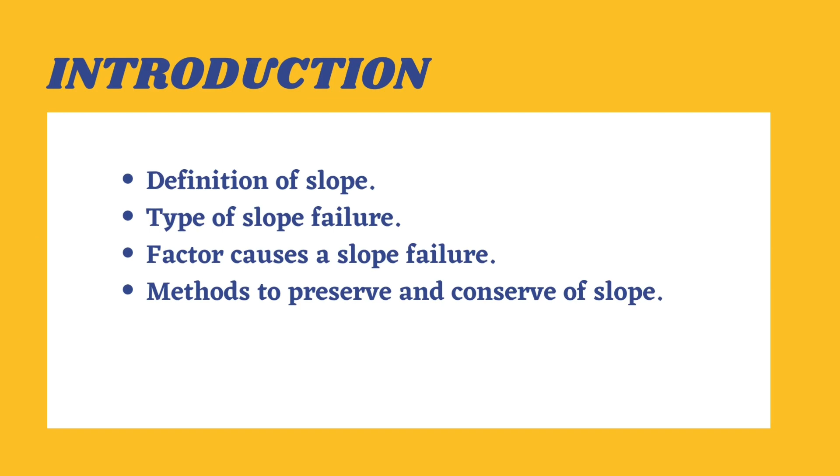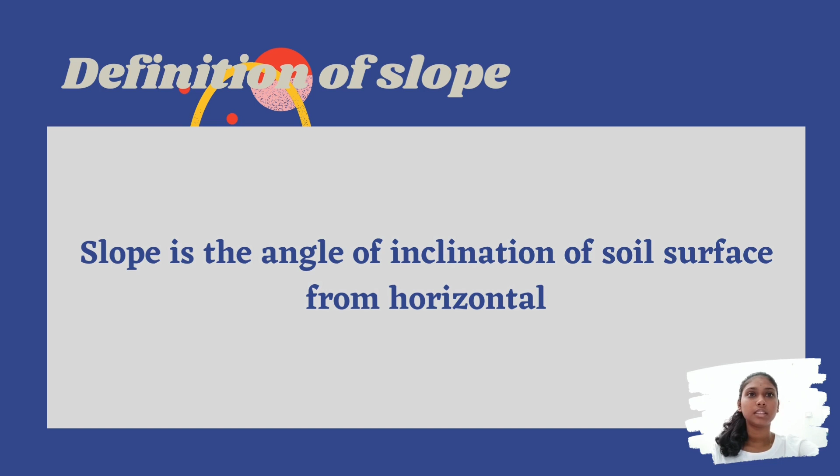Slope is the angle of inclination of soil surface from horizontal. Slope failure falls are usually associated with short-term failure of steep slopes, usually in rock with vertical joints. As lateral support is removed, bulging occurs at the slope footing and tension cracks open behind its crest, usually along pre-existing fissures. This leads to progressive increase of stress and eventual collapse, a process frequently accelerated by water entering the tension cracks.

Second, rotational slide occurs, characteristic in slopes of fairly uniform clay. The failure surface is curved and usually deep-seated. The slipping mass slumps, sinking at the head and rising at the toe. Approximately circular rotational slips are associated with cut slopes of uniform clay, whereas non-circular rotational slip occurs with natural slopes of over-consolidated clay in which weathering has produced a softened upper layer.

Translational slides generally result from the presence of heterogeneity in the form of a weak soil layer located at shallow depth beneath the slope. The failure surface is approximately planar and parallel to the ground surface. If the plane of weakness is at a moderate depth beneath the slope, a compound slide with partially rotational and partially translational character may occur.

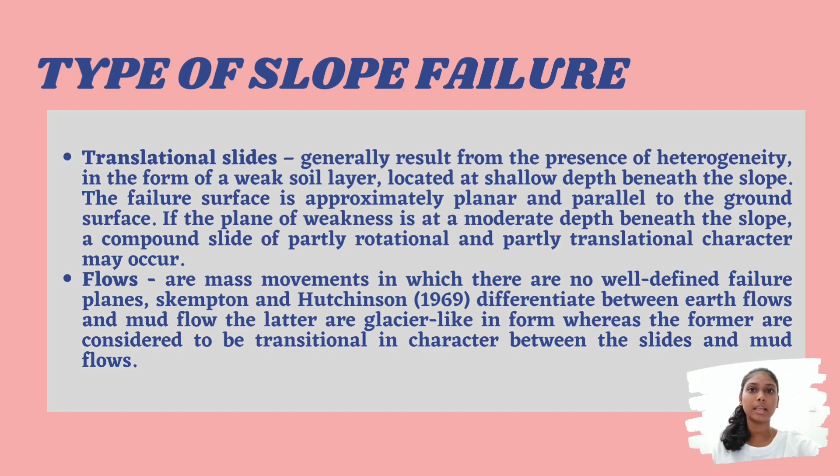Flows are mass movements in which there are no well-defined failure planes. Skempton and Hutchinson (1969) differentiate between earth flow and mud flow. The latter are glacier-like in form, whereas the former are considered to be transitional in character between the slide and mud flow. What causes a slope failure?

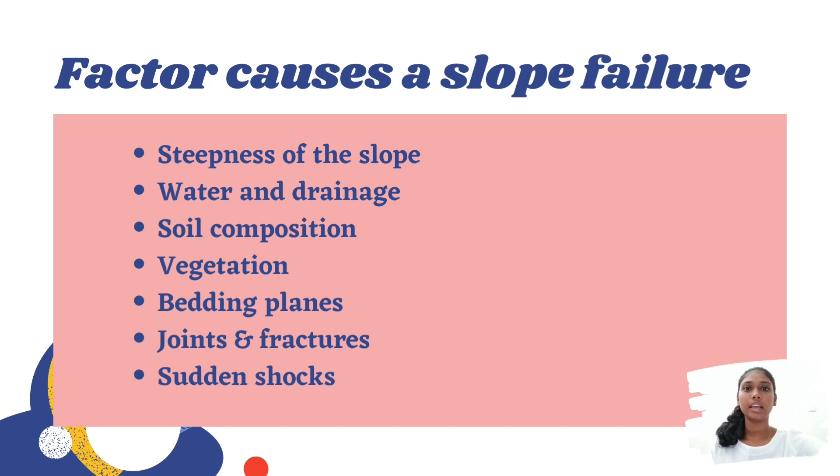Steepness of slope, water and drainage, soil composition, vegetation, bedding planes, joints and fractures, and lastly, sudden shock. Preservation and conservation of slope.

Prevention: natural fertilizer including livestock manure, mulch, municipal sludge, and legume plants such as alfalfa or clover. Manure and sludge are applied by spreading it over the land and then working it into the soil. Strict guidance must be followed in timing application, since both sludge and manure can cause major water contamination if handled improperly. Legumes such as clover or alfalfa are grown and then tilled into the soil as green fertilizer.

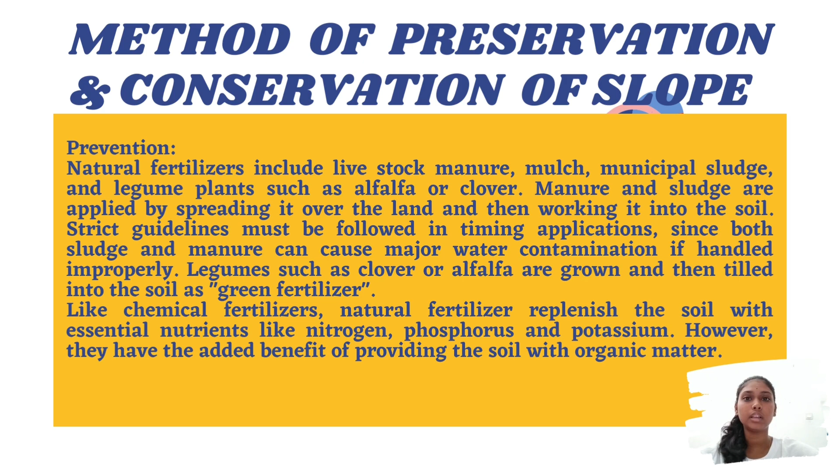Like chemical fertilizer, natural fertilizer replenishes the soil with essential nutrients like nitrogen, phosphorus, and potassium. However, they have the added benefit of providing the soil with organic matter. One of the best ways to conserve soil is to increase the area under forest. Indiscriminate tree cutting should be stopped and efforts should be made to plant trees in new areas.

20 to 25% is said to be the minimum area of forest land for the whole country, which is considered healthy for soil and water conservation. Nevertheless, it was raised to 33% in the second 5-year plan, the proportion being 20% for the plain and 60% for hilly and mountainous regions.

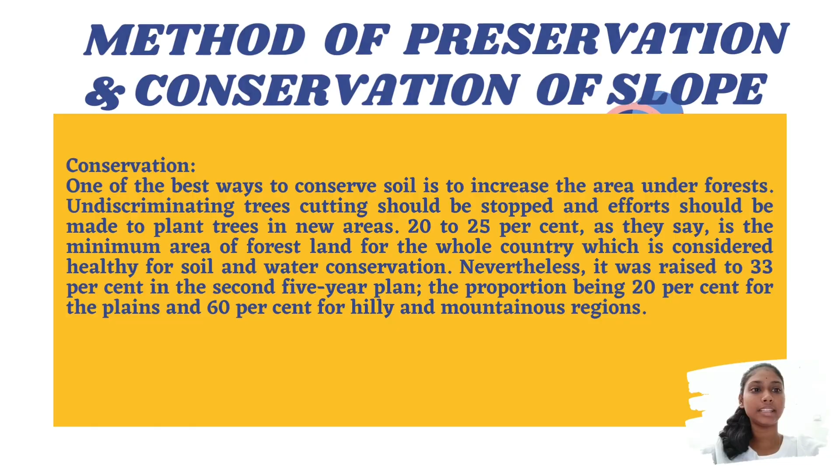There are two analysis data that we use. Firstly, it is a soil density test. We have three samples for this dry density test. For the first, moisture content is 42.67, the second is 33.89, and the third is 53.20. For the average, moisture content is 43.25. Next is for soil density.

The first one we get is 4.48, the second is 3.89, and the third is 3.94. For the average density of the soil is 4.10.

To calculate the unit weight, we use the formula: density of the soil multiplied by G, which is 9.81. The first one we get is 43.95. The second is 38.16, and the third is 38.65.

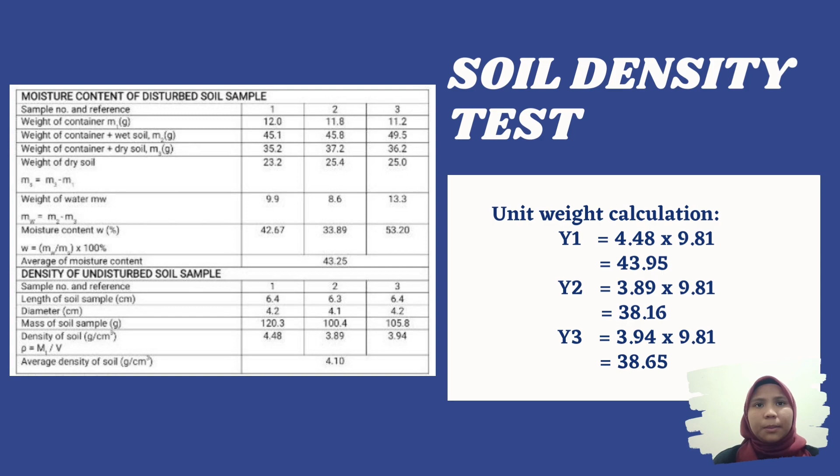Then the second laboratory analysis is the triaxial test. As you can see in the data, there is cell pressure, deviator stress, and major stress. To calculate the amount of major stress, we must add cell pressure with deviator stress.

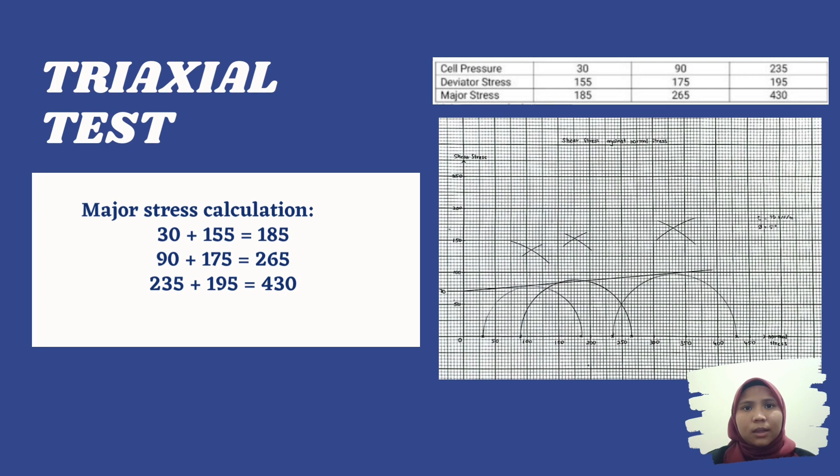So the first major stress is 30 plus 155, equal to 185. The second one, 90 plus 175, equal to 265. For the last one, 235 plus 195, equal to 430. After the calculation of major stress, we use the data of major and minor stress to make a shear stress against normal stress (triaxial) graph.